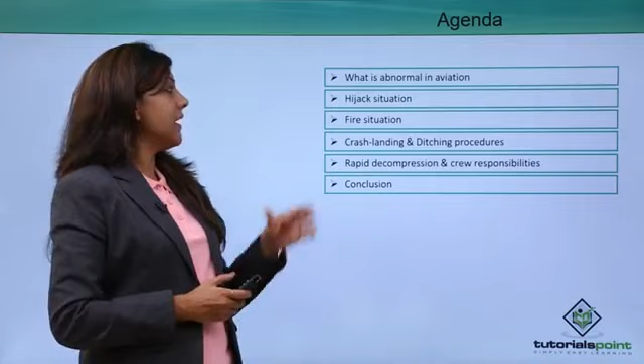In today's module, let's understand what is on the agenda. We will talk about what exactly are abnormal situations, what is a hijack situation, a fire situation, crash landing and ditching procedures. We will also talk about rapid decompression, which is the fall of cabin pressure inside the aircraft, as well as crew responsibility during these situations. I'm very excited to teach you this module.

So friends, if we have to talk about abnormal situations, what exactly is abnormal? Well, abnormal is the opposite of normal, so whatever you expect under a normal situation does not happen under an abnormal situation. If we have to define it, an abnormal situation is one in which the safety of the aircraft or of the persons on board, as well as on the ground, can be endangered due to any particular reason. Endangering of the aircraft and the people can be disastrous, and that is why it is an abnormal situation.

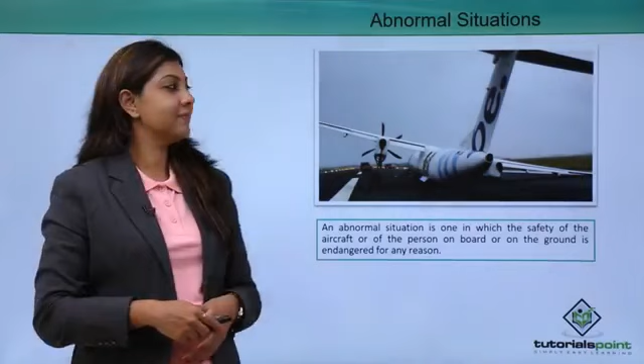During an emergency, a cabin crew needs to be prepared thoroughly because that is the time when she has to take important decisions and judgments. Let's see how a crew can really prepare herself under these emergency or abnormal situations.

In the event of an emergency, a crew is judged on the response and how they conduct themselves. They need to be calm and poised during an emergency. Passengers look up to the crew, hence they need to look confident. The hours during and after the emergency are very emotionally charged and can often be confusing. In an emergency, whether it's flight deck or cabin crew, they are checked on their emotions because emergency is very confusing, so that is the time a crew really needs to be on guard.

Do not release any kind of inaccurate or premature information. Passengers will be very panicked in an emergency or abnormal situation, and the crew should never give out information that is inaccurate or that she doesn't have enough information about.

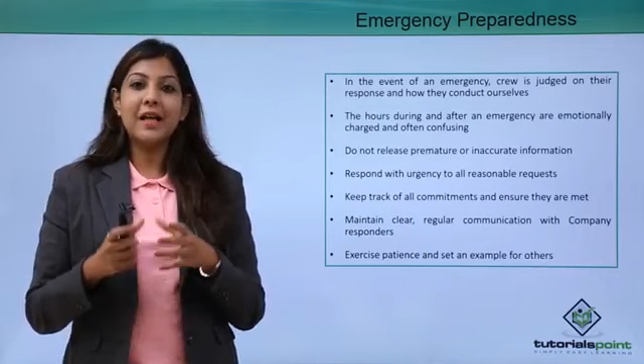Respond with urgency to all reasonable requests. Keep track of all commitments and ensure these commitments are met. Maintain clear, regular communication with company responders. While in an emergency or abnormal situation, there will be people from media, company spokespeople and stakeholders, and a crew needs to have good communication with all such people. Exercise patience, and set an example for other people. That's how a crew can really prepare herself during an emergency.

Talking about an emergency calls for shouting brace commands. What is brace? Brace is telling the passengers to be ready for an impact. When an aircraft lands either on the ground or in the water, there is a big impact, and that impact can injure passengers as well as the crew.

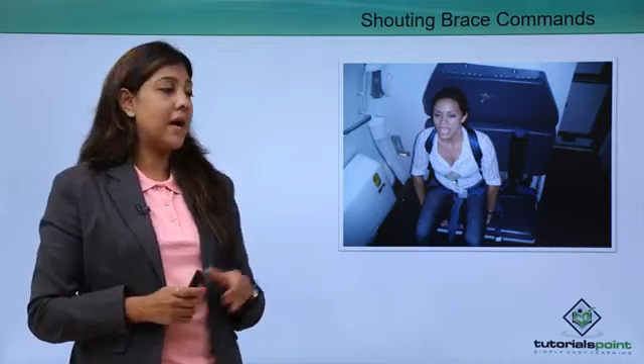The crew needs to prepare herself by sitting in a brace position. What is a brace position? Her hands are underneath her thighs, she is looking straight up, and her back is positioned strongly against the crew jump seat. That is the brace position for a cabin crew, so that she will not hurt or injure herself during the impact of an emergency.

She needs to shout out, as you can see in this diagram, shouting the brace command as soon as the aircraft touches the ground. She needs to keep shouting brace till the aircraft comes to a complete stop and the captain gives the instruction, cabin crew evacuate. Till that time, she will keep shouting the brace command in a loud and clear voice.

Well, there can be a situation of smoke inside the cabin. Smoke is not good for the passengers because when they inhale all this toxic air, they can become unconscious, faint, etc. So what happens when there is smoke inside the cabin?

What the cabin crew needs to do is immediately open the door of the aircraft, make sure that the slide comes off the aircraft, and evacuate passengers because whenever there is an impact of an emergency, passengers have only 90 seconds, that is 1.5 minutes, to leave the aircraft before it comes to a complete ball of fire or turns into flames. So crew needs to make sure whenever there is smoke in the cabin, she opens the door and evacuates the passengers as soon as possible.

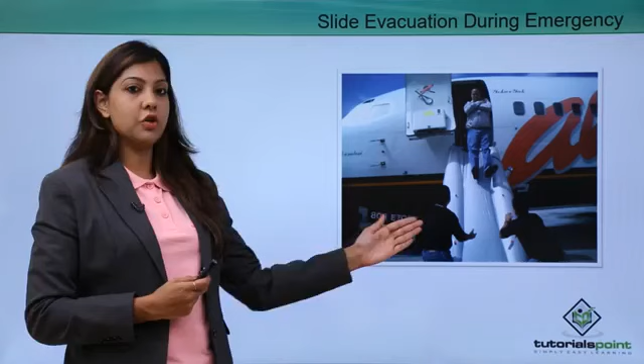Once these slides touch the ground, the passengers need to evacuate by sitting in an upright position with their arms across their chest, and slide down these slides. There will be 1 or 2 people to help you come off the slide.

This can be a very panicky situation because a lot of passengers might feel scared to slide down this slide raft. You need to literally push the passengers if they are feeling scared, because they might be holding other passengers standing in the queue. Remember, there are only 90 seconds to evacuate. Until you do that, the aircraft can really burn and be completely engulfed by flames.

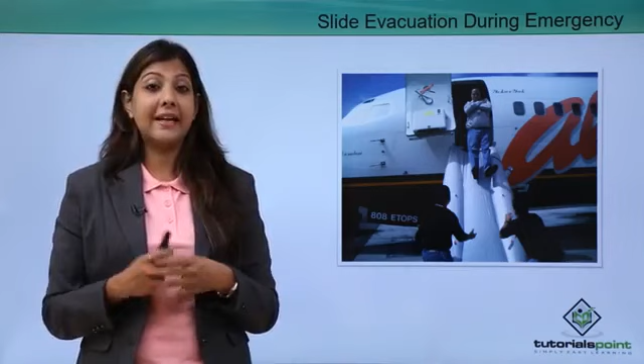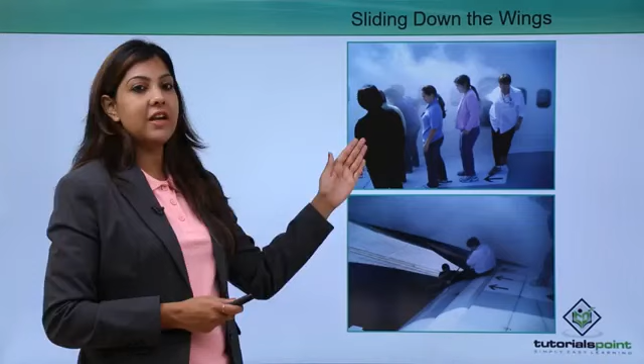The passenger needs to again sit with arms crossed around the chest, and slide through the wing area of the aircraft, with passengers or crew there to help them get off the wing. These are things a crew needs to keep in mind - evacuation needs to be very quick, and you need to shout out your brace commands, making sure people follow your instructions.

Crash landing, friends, is landing on land. When there is an emergency on land or on ground, it is known as crash landing. An aircraft can come to a complete stop on an emergency on ground, and it can burst into flames. For that reason, a crew has to make sure whenever there is a crash landing, she supports the passengers out of the aircraft as soon as it comes to a complete stop, and the captain gives instruction that you can evacuate the passengers. So all the doors of the aircraft will have these slides, and passengers need to come out through the slides.

Well, ditching is coming on an emergency on water - it can be an ocean, a sea, etc. Ditching is a very, very scary situation, and there are very few chances of passengers actually surviving in ditching. In a ditching, the slides will be converted into rafts, and they can be used as flotation on the sea or ocean.

So in a ditching situation, it's important that airlines have certain protocols and requirements. Let's take a look at them. In a ditching procedure, people have life jackets to make them float, etc. So preparation of an evacuation on water is what ditching is all about.

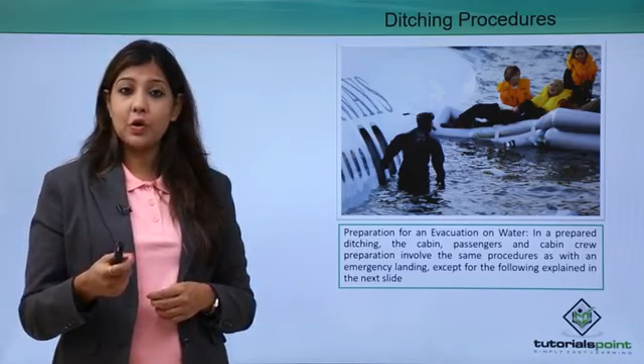In a prepared ditching, the cabin crew and passengers follow the same procedure as that of land, but there are certain guidelines or protocols that need to be kept in mind during a ditching procedure.

Passengers should be informed over the PA system, the public address, about the ditching procedure. You need to inform them that you're going to be landing not on ground but on water, so they need to be informed about it.

The cabin crew should demonstrate how to wear and inflate a life jacket. She also needs to inform passengers that they should inflate the life jacket only when exiting the aircraft and not before, otherwise it will impair the movement of the person.

They should make sure passengers have correctly put on the life jacket and understand how it has to be inflated. If it does not inflate automatically, you need to blow into the red tubes on the side, which will help the life jacket inflate.

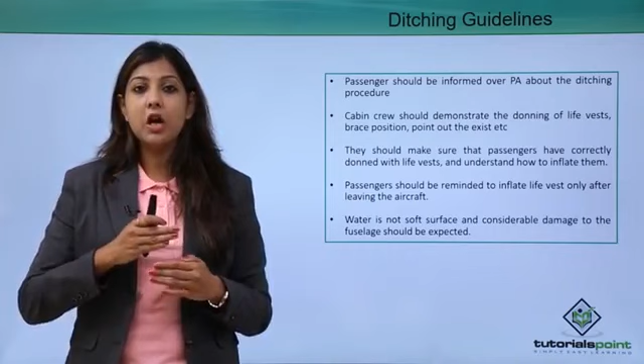Passengers should be reminded to inflate the life jacket only while exiting the aircraft. Water is not a soft surface, and considerable damage to the fuselage can be expected. Even landing on water can be dangerous, and passengers need to be moved away from the aircraft.

A mandatory requirement for any aircraft flying over water is passenger life jackets, one for each passenger, kept under their seat. The crew also needs to have life jackets.

Passengers need seat cushions as well. In certain airlines, they don't have life jackets but use passenger seat cushions as a flotation device instead.

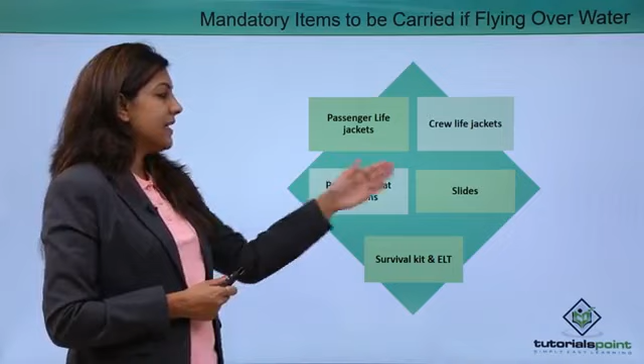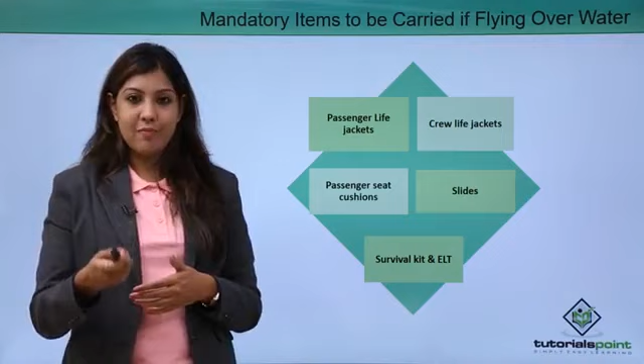Slides are important because they can be converted into rafts. There's also the survival kit and ELT, the emergency locator transmitter. Survival kits are things passengers can use when on water, such as medicines and first aid kits.

Hijack can be a very dangerous situation for passengers as well as crew. What exactly is a hijack? Aircraft hijacking is an unlawful seizure of an aircraft by an individual or group of people. Whenever there is a threat of hijack, it can be very endangering to passengers and crew.

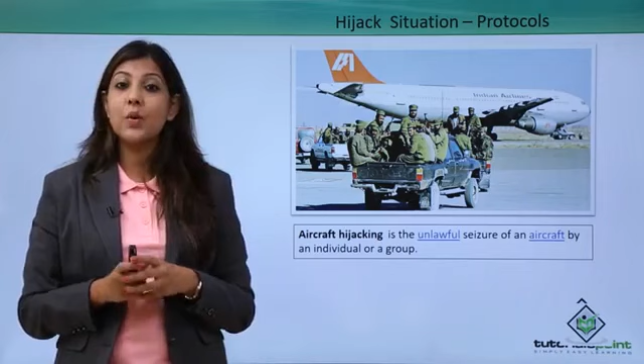In India, there are certain protocols to be followed regarding a hijack situation. Let's take a look at them. Any attempt to hijack will be considered an act of aggression against the country and will prompt a response fit for an aggressor. So it is definitely not a normal situation.

Hijackers, if captured alive, will be put on trial, convicted, and can even be sentenced to death. That is the protocol which India follows.

Hijackers will be engaged in negotiations only to bring an incident to an end, to comfort the passengers, and to prevent loss of life. Often a hijacker negotiates with the country to release certain prisoners or for other reasons, and the country's leaders will negotiate just to avoid loss of passengers' lives.

The hijacked plane will be shot down if it is deemed to become a missile heading for strategic targets. If they are trying to target a particular thing, the hijacked plane will be shot down, as per the rule given by the government of India.

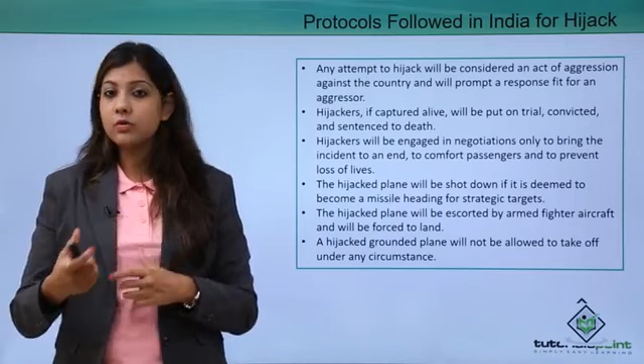The hijacked plane will be escorted by an armed fighter aircraft and forced to land. A hijacked plane on the ground will not be allowed to take off under any circumstance. The government of India says negotiations will continue, but the plane will not be allowed to take off.